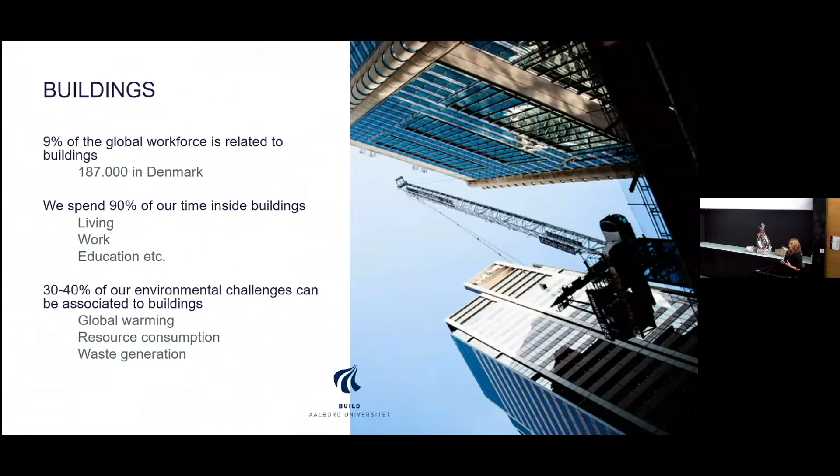Buildings are an important part of the sustainability of our society. 9% of the global workforce is related to buildings. In our part of the world, we spend about 90% of our time inside buildings, on average, of course, and 30 to 40% of our environmental impacts are related to buildings.

For the climate impacts of buildings, which is the subject I will focus mostly on today, 39% of the global greenhouse gas emissions are related to buildings. 11% is what we call embodied, that is related to materials that we use to build new buildings or maintain our existing buildings. 28% of the emissions are related to what we call the operation of a building, so when we are heating, cooling, lighting up the building, and so on. So it is important to look into environmental impacts of buildings.

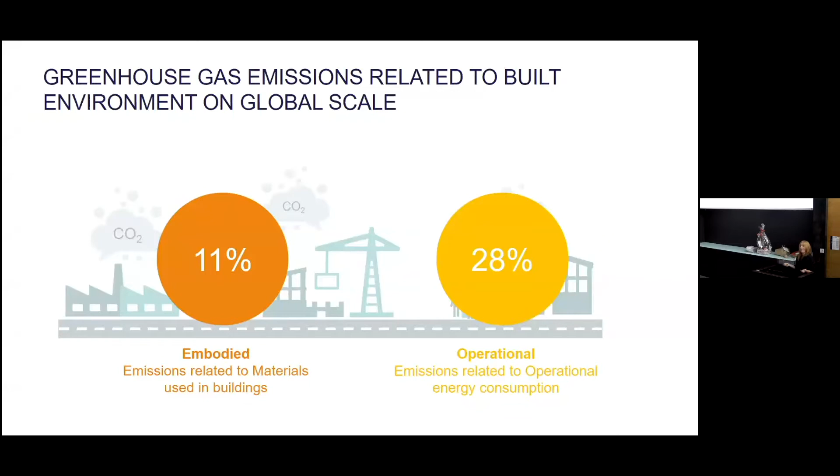Since 2001, I have been working with LCA and developing sector-specific tools for LCA. During my PhD at DTU, I worked both with development of an LCA tool for road construction and also took part in development of a tool for waste management. And then I had a break from academia and I worked as a consultant engineer in Iceland. And there I gained experience working with those sustainability assessment tools that were getting more attention in the building sector. They are called BREEAM, LEED, DGNB, and so on.

And when my family and I decided to move back to Denmark in 2009, I decided that I really wanted to work further with development of those sustainability assessment tools, because my experience from my work with it in Iceland was that it needed a lot of development, especially the use of LCA in those tools. So I was really, really lucky that I got a job at what was called the Danish Building Research Institute at Aalborg University.

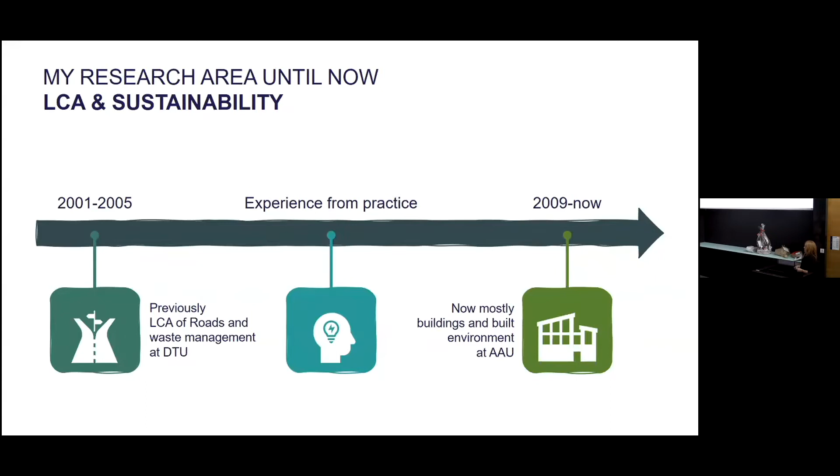And there, since 2009, I have been working with different subjects, both with the sustainability assessment tools for buildings, development of LCA tools, and also development of the methods that we use to evaluate the environmental impacts of buildings, and of course also several analyses of the environmental impacts of the built environment.

So if you look a bit into sustainability assessment of buildings, my first projects at BUILD were actually within sustainability assessment and the establishment of the Green Building Council in Denmark. First, I was participating with colleagues in the assessment of different possible certification methods that could be used in Denmark. And later, when they had chosen to work with the German system, which is called DGNB, I was the editor for the adaptation of the system from German methods to Danish methods, aligning it to the Danish building sector and needs. And later, many of my colleagues at BUILD and I have also been involved in the development of what is called the voluntary sustainability class in Denmark, which is now in a test phase in the building sector.

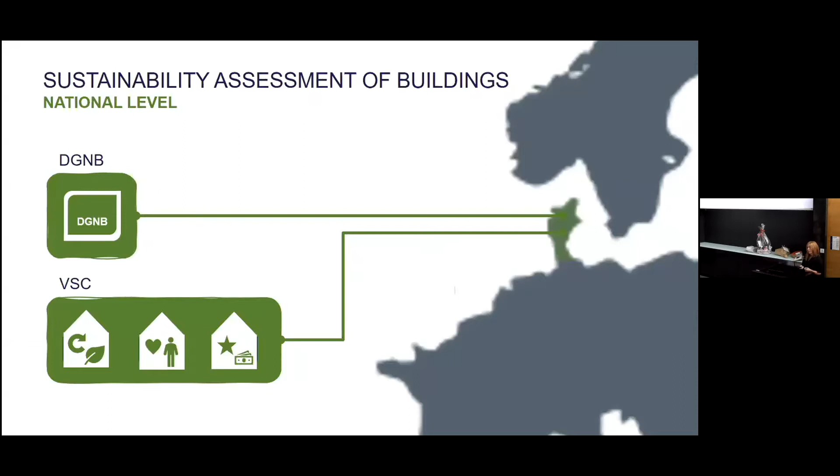On a European level, we have also participated in testing of a European sustainability scheme for buildings, which is new. It's called Level(s), and this was tested by about 18 building projects in Denmark. And Build very often has this task of documenting across building cases and so on, and that was what we did: participated with a lot of companies in Denmark to test this European scheme called Level(s).

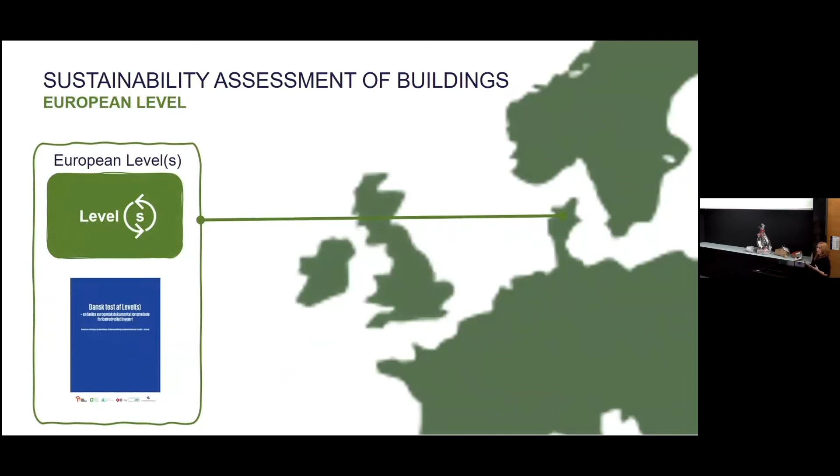And it will be really interesting to follow which role Level(s) will get in Europe, because we need a transformation of the building sector, and we can see that perhaps Level(s) will get an important role in the building regulations in the different countries in Europe.

And just to conclude on the sustainability assessments of buildings, I have also been involved in testing 10 different certification methods that are used globally. And what we have tried to look into here is to map what they include and how large a part of sustainability they actually assess, because that is really important for the users, the consultants out there working with those schemes, that they understand what the target is with those tools that are available.

So our research at Build is focused on research to the industry and to academia. And like at all universities, our research results in some academic papers. But maybe, as Per just mentioned, I am no less proud of the research that we do for the industry, because I personally believe that what we do to transform the industry into more sustainable construction also benefits the academic research.

And here we have developed the Danish national LCA tool for buildings, and we also developed several guidelines for stakeholders in the built environment, as well as research analysis and so on.

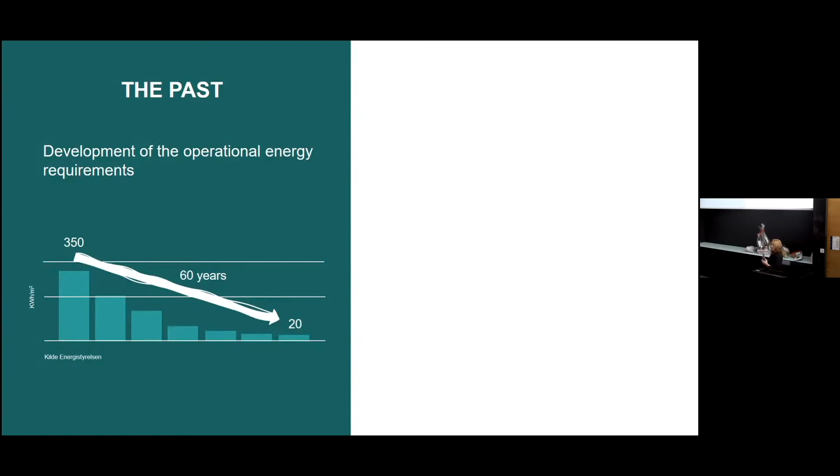So for the past 60 years in Denmark, there has been a focus on regulating and bringing down the energy consumption in buildings. And this has been a fruitful development, and the requirements are always getting stricter and stricter for the energy use in buildings when you design a building. I know there's a lot to discuss here about the use when the users move into the building, but I will leave that to other people.

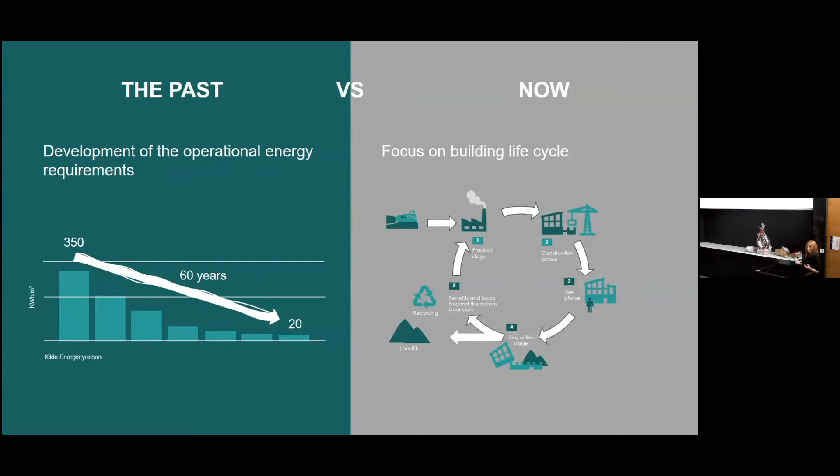But this also still brings focus to the whole life cycle of a building, where we look into both the energy consumption of a building and the materials that we use in a building. So when we are working with life cycle assessment, we look into the construction, the building materials, the building site, and then we look into the use stage of a building where we have energy use, but we also replace materials, and then there's also the end of life, the waste treatment of the building materials.

What follows then are the future scenarios, what happens in the future. So we know that buildings usually have, and hopefully all have, very long life cycles. So this is an important part to look into. But at the same time, we also know and hope that there will be a huge transformation in how we produce materials and how we produce energy and so on. So the future that we're calculating is also very uncertain, but hopefully it will be a green development.

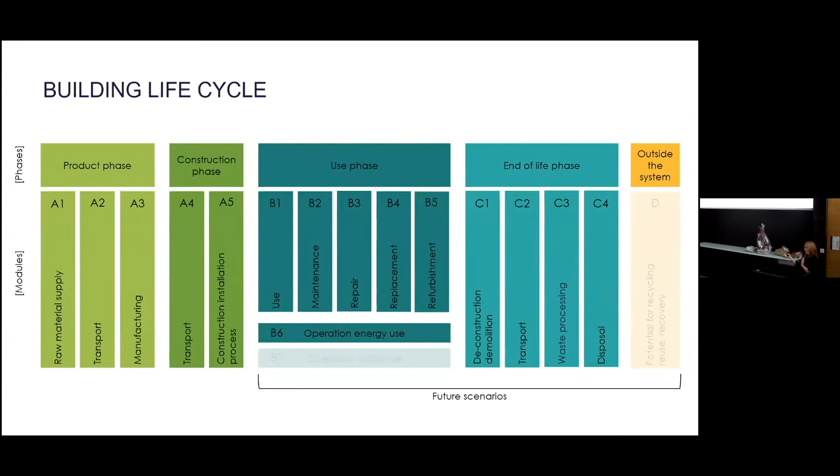So to focus on what I have been working with in research, I want to start with LCAbyg, the tool we talked about. LCAbyg has been the core and focal point of research in our group, because it's not only software development, but also development of calculation methods for how we calculate CO2 emissions and other environmental impacts from buildings. At the same time, we are working on developing a sound simplification of the methods and usability, because our vision is to mainstream the LCA discipline in the built environment by bringing this practice out from the walls of this university into practice. We are all very thankful for the opportunity to work with LCAbyg.

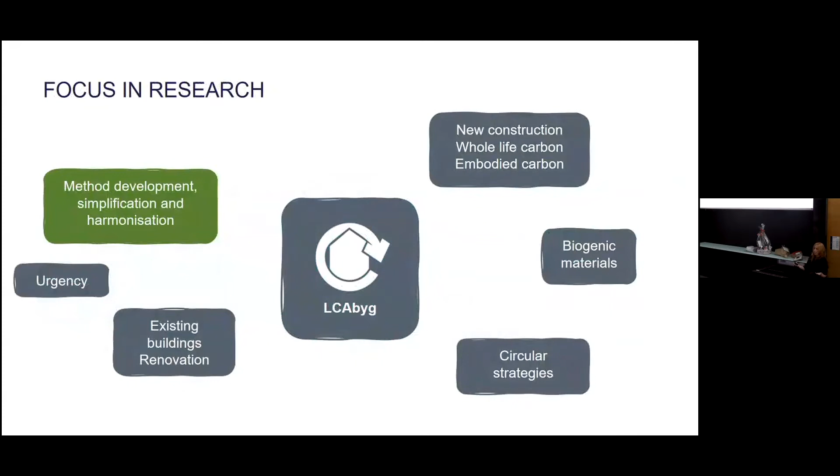I will leave this subject and talk about method development, simplification and harmonization. This is something we've worked on in two extensive international projects, the International Energy Agency Annex 57 and Annex 72, in Nordic cooperation, and also for national purposes when developing how we work with LCA for DGNB certification and now for the requirements in the building regulation. Why do we spend so much time on this? Because methods matter a lot and have a lot of influence on our results, and there is a huge focus on harmonization internationally, on European level, on Nordic level. So I will give some examples of my work within this area.

In Annex 57, one of those international projects, we worked on 80 different international case studies, which we gathered and compared, focusing on analyzing the methodological differences and their importance on results and the need for harmonization. In the figure, remember phases A, B, and C—A is the production phase. If we look at the upfront emissions, the emissions that happen now, in 59 cases we compared, we can see the reported emissions vary from 0 to 1,100 kilogram CO2 per square meter. We know from our research that embodied impacts can vary a lot, but not that much, because this is also explained by differences in methods used to calculate. That is why it's so important to harmonize methods and find out how to calculate this.

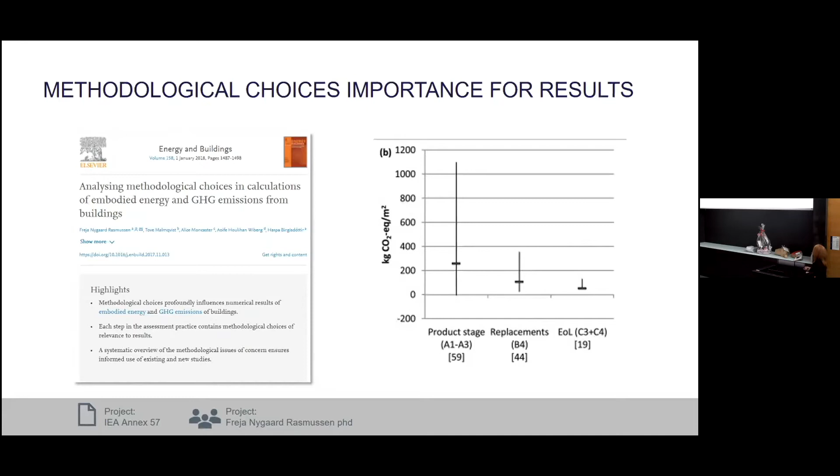A second thing about method development I want to focus on is, again, about time. This isn't a time management course, but it's so important to look into timing, and that's something our research group has focused on a lot. Here we see an empty scale looking at time in years, along with the stages in a building life cycle I talked about earlier. It's really important for us to illustrate this on a time scale for people working with our tool and understanding our analysis, because, as mentioned earlier, we have an urgent crisis. Buildings are a really important part of greenhouse gas emissions, so it's important to focus on what happens now and in the near future, because it's in the near future we need to bring emissions down.

There are also a lot of developments around timing that we're working on in our research. First is operational energy use—what we've focused on in our research group, in the LCAbyg tool, and in our method, is using a dynamic approach for calculating the future, taking into account how future emissions of energy production will change over time, since there are a lot of political agreements about changing energy production over time. That is included in our calculation method.

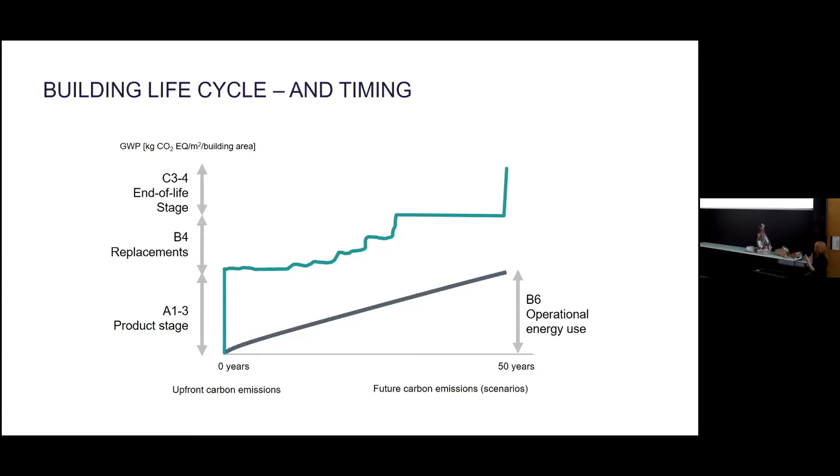That is why not all other countries are doing it this way. Here again, there are different methods, but I think many countries around us are making the same assumptions or considering that.

But it is also so important to look into time. If this was another building that has much higher emissions in the beginning, or another case where the emissions are low now, and so on, it is really important for us to take into account.

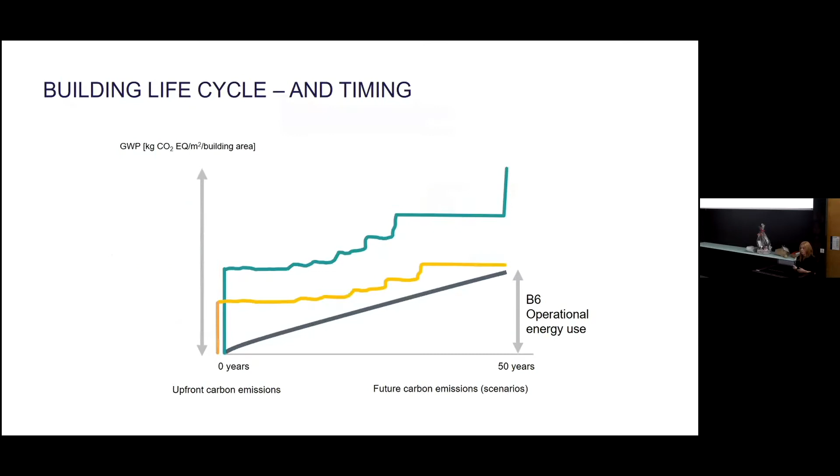And why all this focus on time? In Denmark, there's a focus on and political agreements on reduction of the emissions of greenhouse gases with 70% in 2030 compared to 1990. And in Europe, there are goals of having a climate-neutral society in 2050.

We're talking about 30 years from now. The IPCC reports show us that there is a need to reduce emissions as fast as possible, as Pierre also mentioned, to be able to meet our agreements to reduce our emissions.

First, one important report and study we have been working on was this whole life carbon assessment of 60 building cases, which was published in Danish in 2020 and also translated to English due to requests from the European Commission. This report was done about 1.5 or 2 years ago. The purpose was to establish sufficient data background on the climate impact of buildings in Denmark over the life cycle, and also on basis of this to calculate possible reference values that could be used in the building sector.

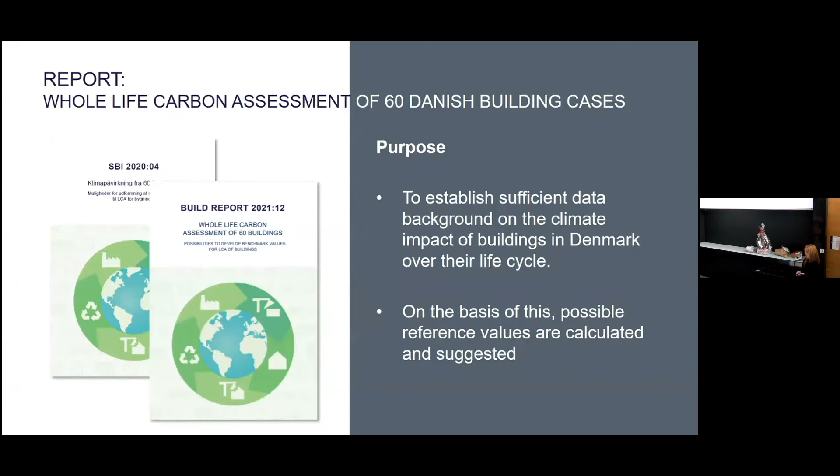And you remember that this is something that has not been regulated yet, the use of materials when you construct a new building. But this was the groundbreaking part that is happening in 1 year, 1.5 or so.

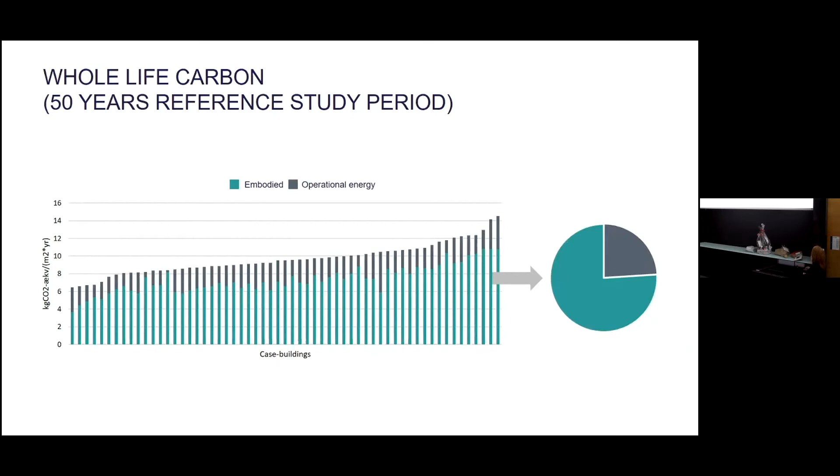Important lessons learned from this study was the importance of embodied impacts. They are important, about 75% often in building cases. Secondly, the timing of emissions is important - when do they happen, over time.

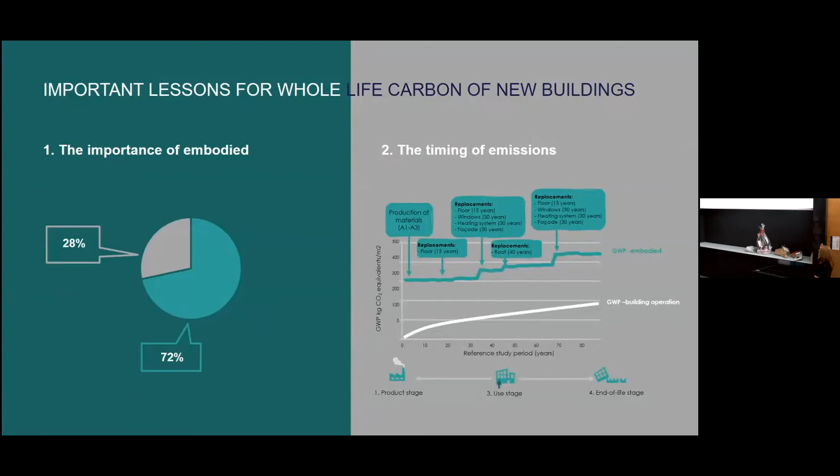That is important. If we look into the results, when we calculate the whole life carbon, both energy and materials, the results vary a lot, about a factor of 2.2. And if we look into the embodied impacts, the materials that we have not been regulating, this varies from 3.7 here to 10.8. So this is about 3 times.

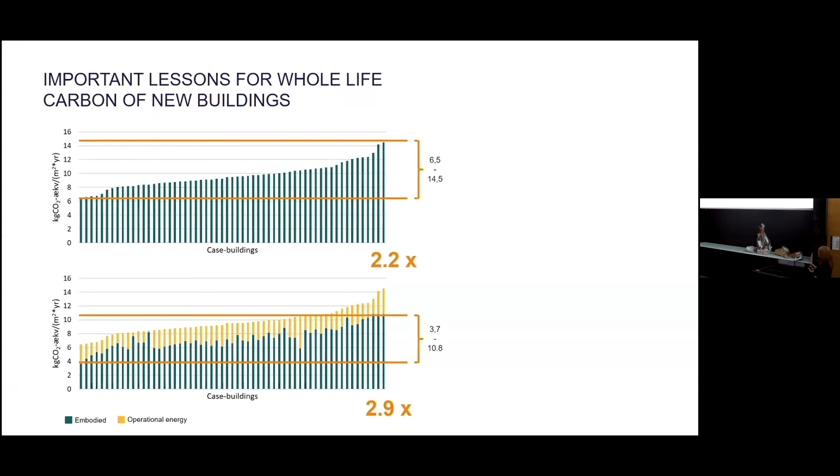So this must tell us that there is a huge potential to do some reductions, because if we can build some acceptable buildings with about 2 to 3 times lower greenhouse gas emissions, then there must be a potential for many of the other buildings to follow this.

So where have those results been used? In Denmark, the government had climate partnerships, cooperation with the industry and different partnerships. One of, I think, about 13 partnerships they established in 2019 and 20. One of them was focusing on the construction industry.

This partnership of the construction industry also used the results of our study to suggest, this was in March 2020, that we should have requirements for LCA CO2 requirements in the building regulation in 2021. This is 12 kilograms CO2 per square meter per year based on our results. And then we should also have an incentive for the industry to work with even lower requirements.

So we have this voluntary sustainability class to try to have some competition here. And it's also important for the industry to know the future requirements to come. So in 10 years to come, you should know that we should halve the emissions, going from 12 to 6.

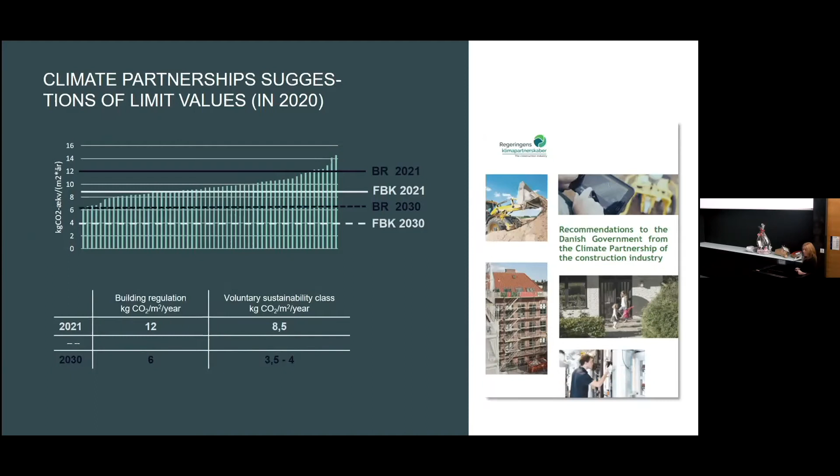And then the voluntary class should be among the lowest buildings. And what we should know is that in 10 years, all normal buildings should be around the best buildings that we know today, and for the best buildings, we need to figure out different ways how to build those. So they should be here around 3.5 to 4 kilograms CO2. And this is something that needs a lot of new ways of thinking in the building sector.

And then the new national strategy that I also mentioned, which came in March '21, they also had those requirements, followed up on what came from the climate partnerships. So we have both a building regulation requirement and a voluntary class, and they also know what the requirements will be in 10 years. And just to see, this is in the same area of ambition levels as was proposed by the climate partnerships.

So if you look from a national perspective, where they have used our research to look a bit into an international perspective. And here again I come to the Annex 57 project that I mentioned earlier, where we again looked into those 80 buildings. And here the conclusion for our international cooperation was that embodied impacts are important, but above all, the methodological harmonization needs that I mentioned earlier are really important.

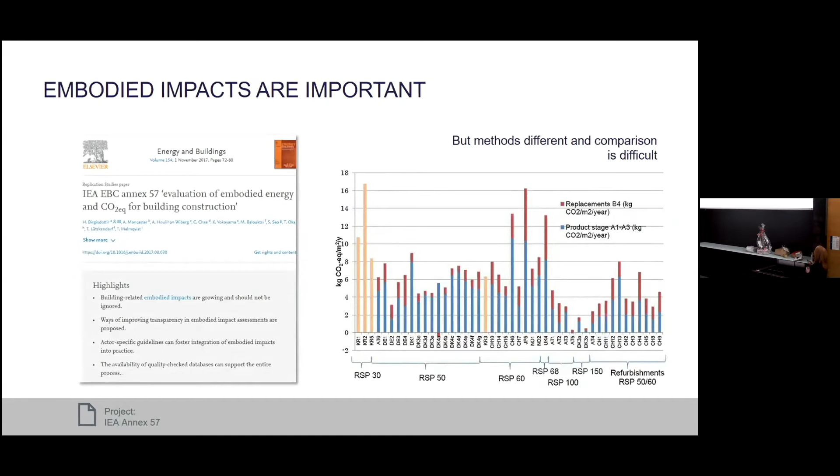And a second project that we have been working on, the Annex 72, in relation to that, a group of people from that project were also working together, several researchers from different countries. And here we were analyzing 650, I think if I remember correctly, building cases that we were working with, analyzing those.

And what we concluded there by looking into several international studies, was that although we know those methods are a bit different, we tried to align our analysis so we could compare as well as possible. But the bottom line here was the message that embodied impacts, the materials, are really important to include in regulation, and that embodied greenhouse gas emissions might actually be the hidden challenge for effective climate change mitigation.

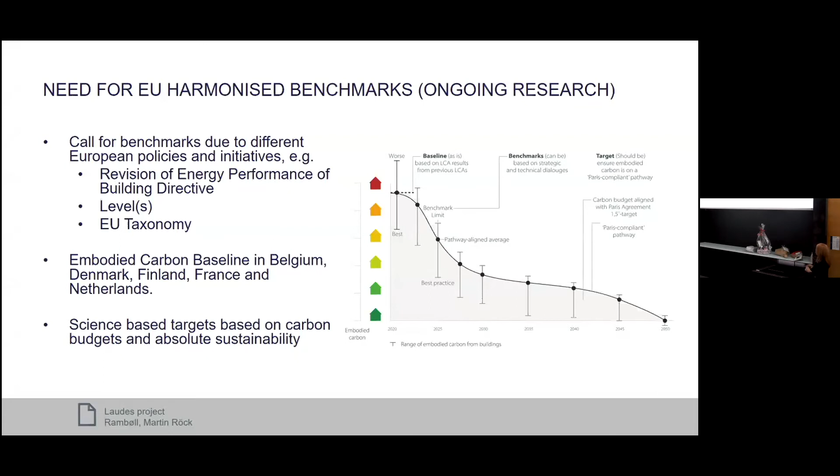But also what we want to do is to take into account that what we have done earlier is often to look into how did we build and how can we reduce a bit, always depending on how we built yesterday, and reduce a bit better. But what if we look into the real climate budget that we have? What is then our benchmark if we look into what we actually have to work with? And that is one of the things that we are working with in this project.

So there is no doubt that we need to reduce climate impacts related to buildings, but what do we have in our toolbox? So again, from the Annex 57, we looked into different design strategies and compared reduction strategies, how much you can reduce with different design strategies. And there are a lot of potentials there.

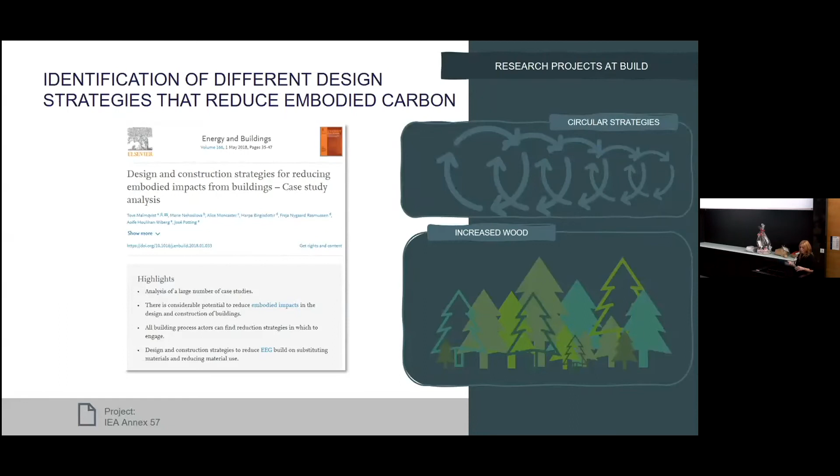And what I want to bring into focus are just two, if you call it a design strategy, that we have been working with in research projects at BUILD. So one is about circular strategies and one is about increased use of wood in buildings. I could, of course, mention many more, but I will focus on that. So first, use of biogenic materials, increased use of wood in buildings.

So the conclusion is, of course, a quick conclusion now, but the conclusion is, well, it is not enough to just say we should use wooden buildings and then everything is fixed. Because we can also make some unclever decisions about the roofing material or the foundation or whatever. So again, the use of our LCA tool is really important to make sure that we continue with the clever decisions to keep the result in the lower end.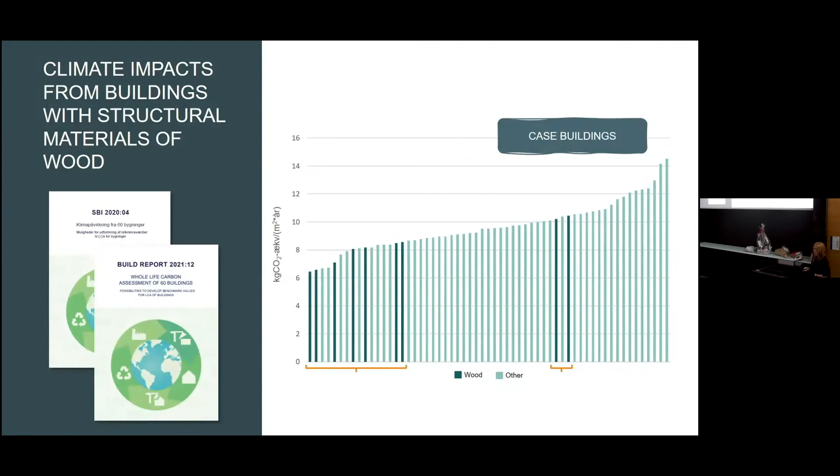And, well, there are several studies, not just this study that I showed earlier, but several international studies that suggest that wood in buildings can help to reduce the climate impacts. And that is why we have a larger research project on this. And we have just published a study where we examined 79 scientific articles that focused on 226 cases using wood in buildings.

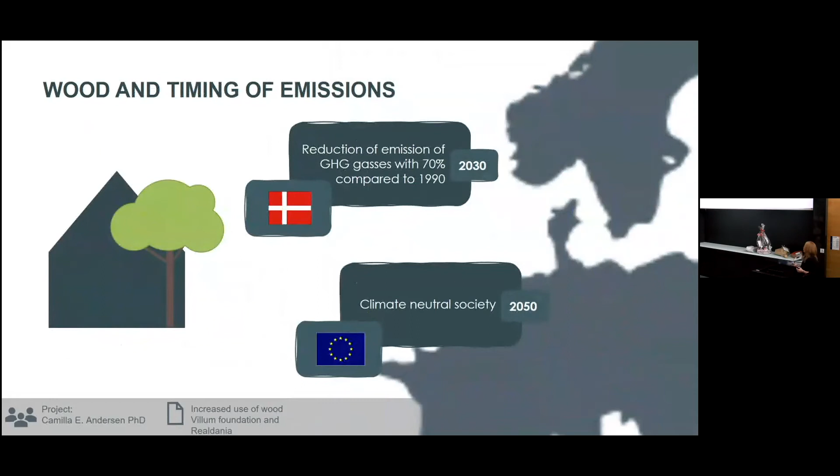And we are also looking into use of wood in buildings from different perspectives, not just because of our goals to reduce in the urgent future, but also there's something about this time scale and some properties of wood that we are working on. So timing of our emissions is really important. Greenhouse gas emissions accumulate in the atmosphere, and the sooner the emissions occur, the longer time they have to accumulate there. So there is larger potential for global warming if it happens early.

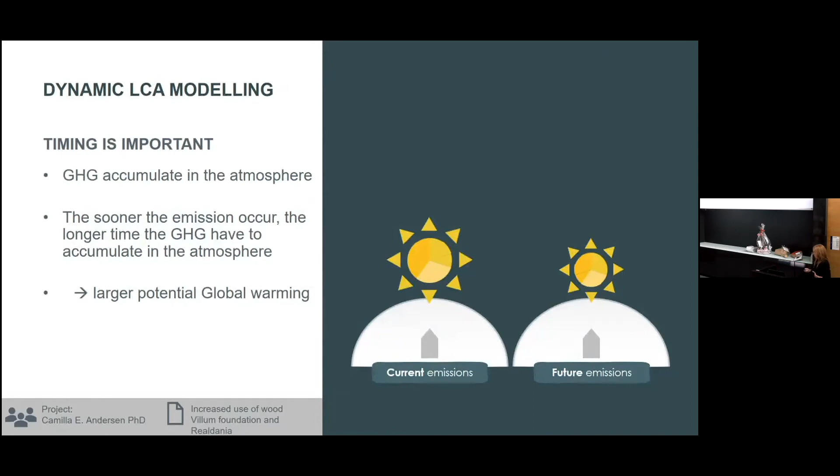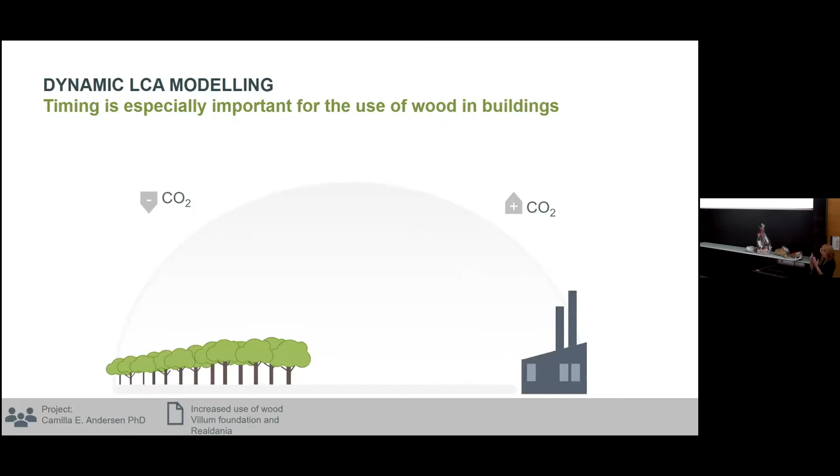But there's also something about wood that is really important for us to look into, because when trees are growing, they absorb CO2 from the atmosphere. And if this is used in buildings, it might be stored there, and then at some point in the future, not just when it is combusted, but also when it is degraded, this CO2 will at some point be released to the atmosphere. But what many researchers and the building industry are looking into is how large is this potential? How much will this save us if we store more wood or timber in buildings?

And here again, we know that dynamic LCA modeling is important to look into this timing. And again, we do things in different ways. So now I have just Denmark and Sweden, the neighboring countries, just to illustrate how we calculate this. So in Denmark, as in many other countries, we allow taking this uptake of CO2 in the wood into our calculation, so we can see that in our time scale there might be a potential. This is an extreme good case, but they might differ. And then in the end, hopefully not after 50 years but in much longer time, this might be released again. But we need to take that into account because this will happen at some point.

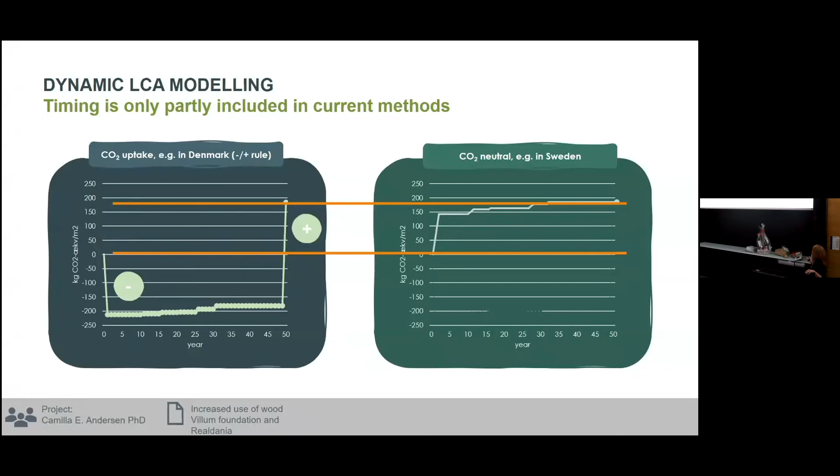But in Sweden, or in other countries as well, the wood is regarded as CO2 neutral, so we don't take this minus into account, but we have the same results in the end.

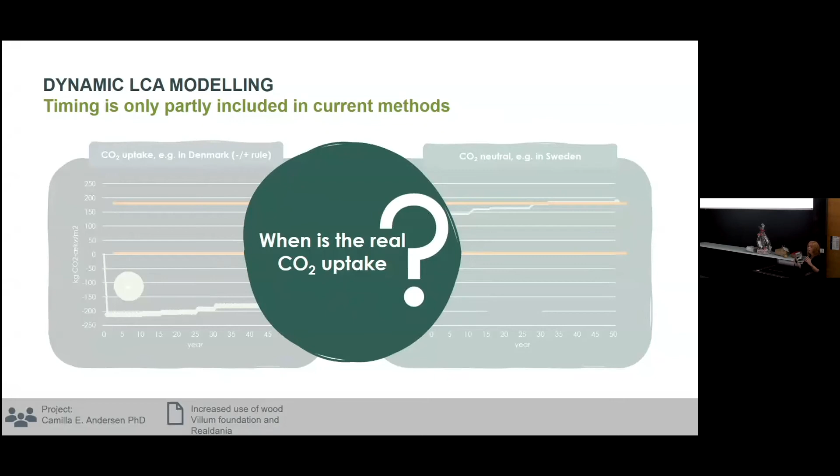But this is something that we really want to work further with the building sector to find out when does this CO2 uptake happen, because that is really important for us. Since we have to reduce a lot in the next decade, and by 2050 be CO2 neutral, it's really important for us to understand this.

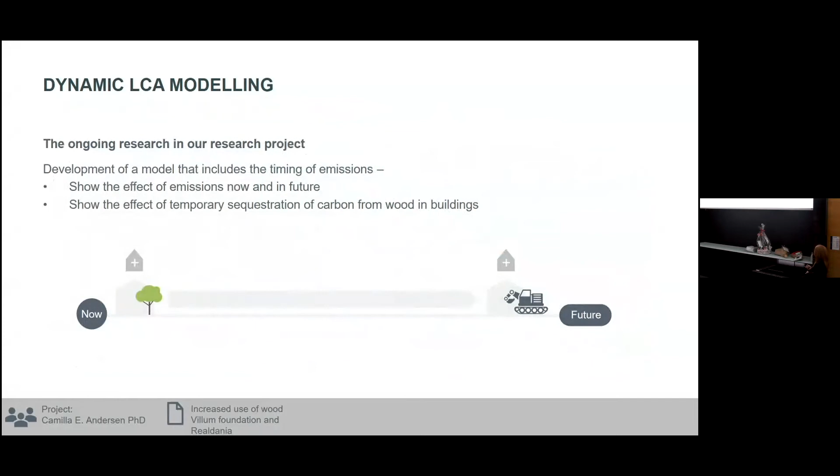And that is what we are working with in ongoing research projects, where we are looking into dynamic modeling of this, and when do we really have this uptake? How much will it help us in fixing our problems? Yes.

Very quickly about circular strategies. There's a lot of focus on circular economy, recycling, reuse. How can we work with that? And we need to know what is the potential here also. And of course, reusing materials and different other circular strategies, we know in a resource perspective there is a potential, but now I'm focusing a lot on the CO2 perspective.

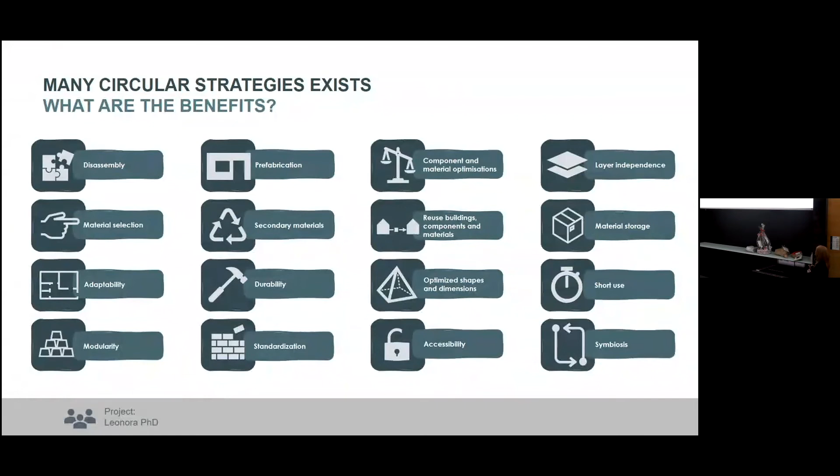And this, again, relates to a PhD study performed by Leonora, where we can show, okay, looking into literature and practice, many circular strategies exist. In my point of view, many of the circular strategies that we are talking about here are actually also what we just called eco-design and so on. But now they are here defined as circular strategies. But what is the real benefit? That is really important for us to look into.

And again, my take-home message here today: what we need to look into is when do we really have those reductions? Because we might have many good intentions to work with circular strategies, and I'm sure that in most cases it is good, but if we are focusing on CO2 and we think that we can solve our climate problems with circular strategies, we need to look into when does it happen.

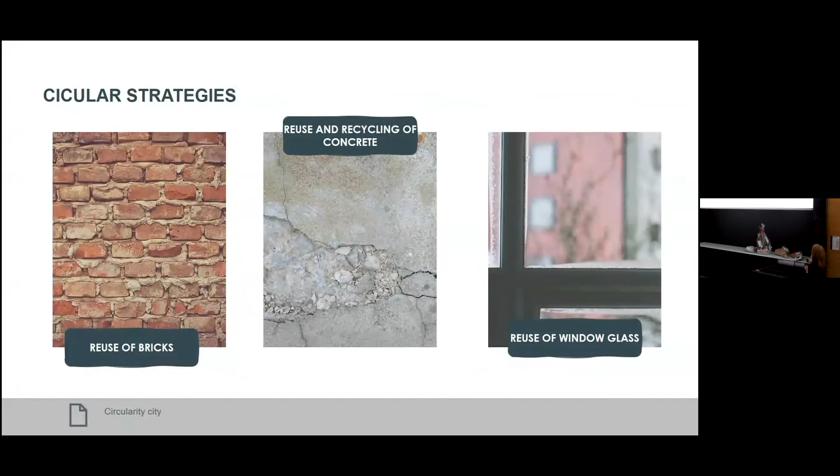So if you focus on upcycling, upcycling is like recycling, and there the effects happen when we build the building. Then different circular strategies exist, and there is a lot of focus now on reusing bricks in buildings, reusing, for example, crushed concrete in new concrete, and reuse of window glass. So if you just look at those and what we have done in some studies, then we can see reused bricks have quite a high potential to reduce compared to virgin materials. So that is a good strategy to work with in terms of CO2 and in terms of the amount of reused bricks we have available.

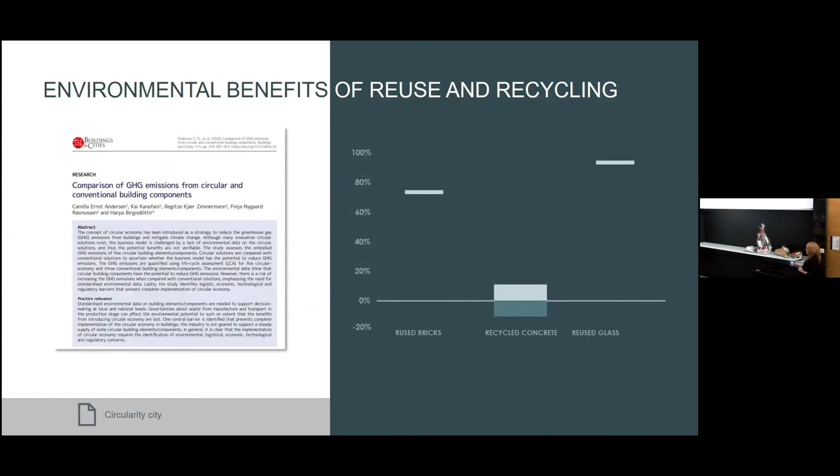If you look into recycled concrete, it is a good strategy in a resource perspective and so on, but when we look into CO2, then not that much savings, and savings will not necessarily happen. But again, reusing glass, if it is possible to use this old glass in new windows, then there is also quite a high potential there.

And then what we have also been looking into, and what Leonora has been working on, and Freya in her PhD studies, is design for disassembly. That is where we produce materials today, and we want to make them so good today that they can be reused in the future. And that is, of course, very important for us. But we have to keep in mind that this will give us some savings later on.

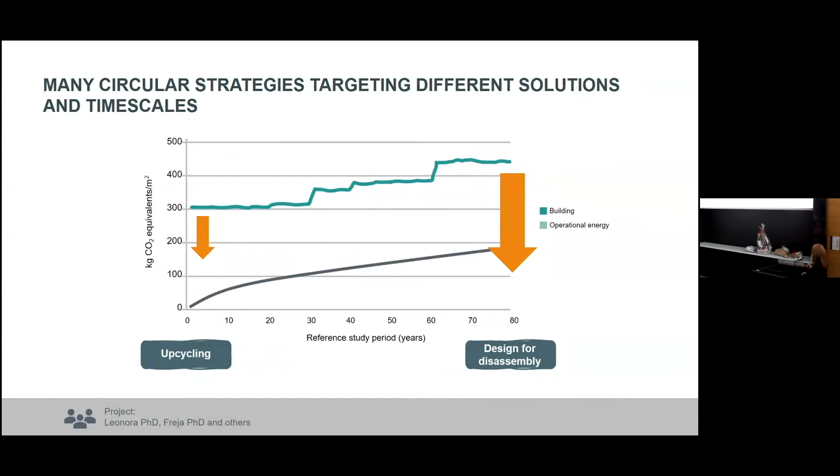But here, Leonora has worked in her PhD to look into, okay, if we want to do this, how can we calculate this, and how can we divide the emissions that happen, or should we do that, divide the emissions that we have when we produce materials, for example here, a concrete beam that perhaps can be reused again.

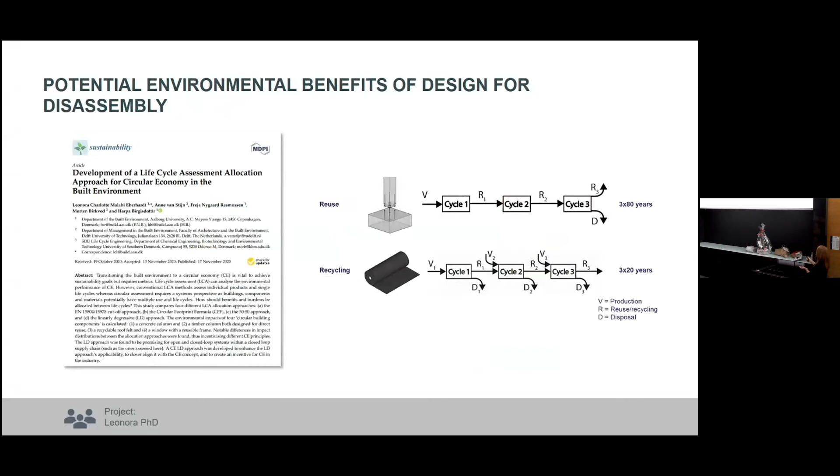We want to focus on renovation today. There's a huge focus on renovation of existing buildings in order to bring this energy consumption down, and there is no question that is something that we need to do. And then what we have to keep in mind is that we are using materials, so there will be some embodied emissions used, if we can say so, in order to bring the energy consumption down.

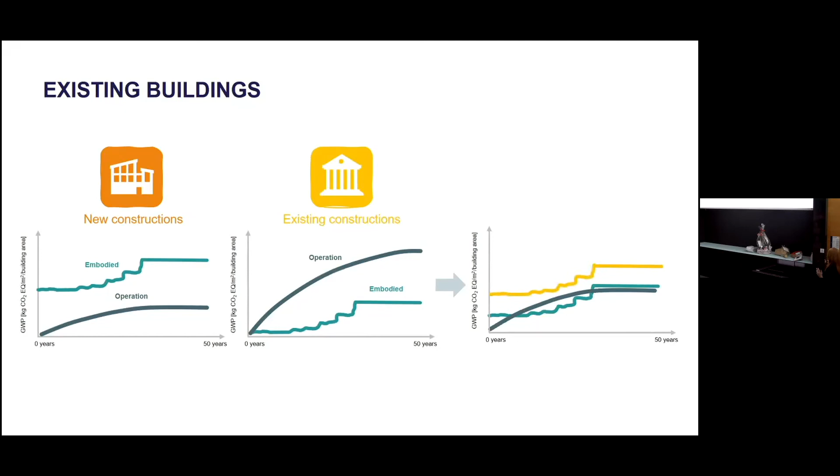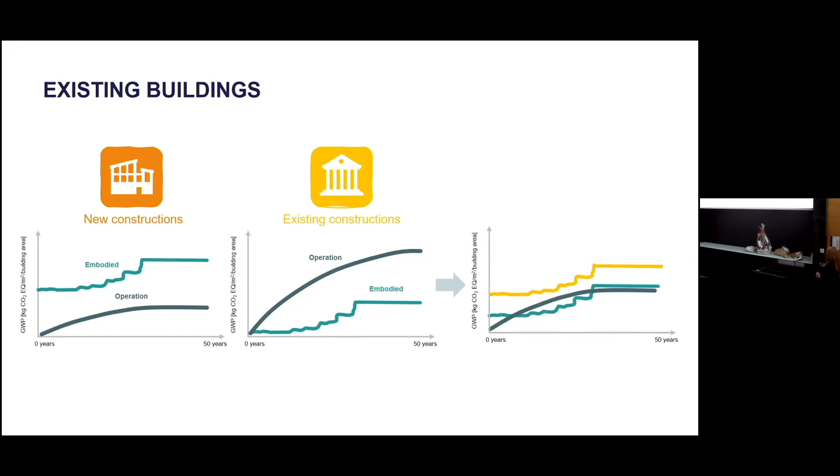But what we know is that very different methods might be used for those, and many different materials exist. So as we showed you earlier, that you can also build buildings with different methods, it is also important to take into account the embodied emissions that we are spending in order to bring down the energy consumption.

So I am slightly getting there, and I want to talk a bit on urgency. Maybe you think I have been talking on urgency all the time, but I want to focus on that. So in Denmark, we have the Earth Overshoot Day on March 26. That means that in Denmark, we need about 4 Earths for our current consumption. And we know that we don't have that available. And in order to work with this, the emissions are also quite high.

And we have these requirements in Denmark for CO2 emissions, and are they then meeting the need for reduction? When we have set those benchmarks, for example this one of 12 kilograms CO2 per square meter per year, that is based on something that we call a bottom-up approach. It is based on experiences that we get on how we build buildings, trying to do always better and better. But the top-down approach focuses on what is our budget and what is then my benchmark. That is something that we also need to look into in our research.

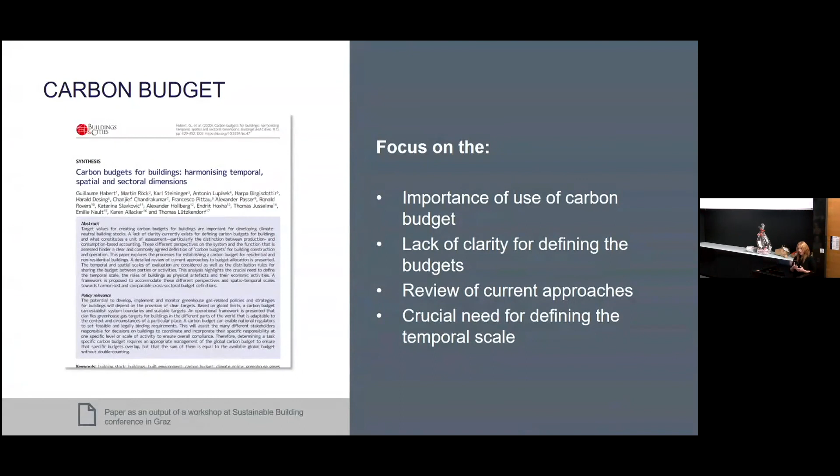So that is something about carbon budgets that we are working on together with many international researchers, focusing on those budgets and on planetary boundaries, which say when we are using more than what is available with only one Earth. I have been so lucky to be involved in different projects, so here I'm highlighting the people that have been really working on it. The master project of Pernille and Camilla, where I, together with many others, have been supervisor. Here we've been looking into how we are building our buildings. These are the mini CO2 houses, which are good examples. But how are they meeting our

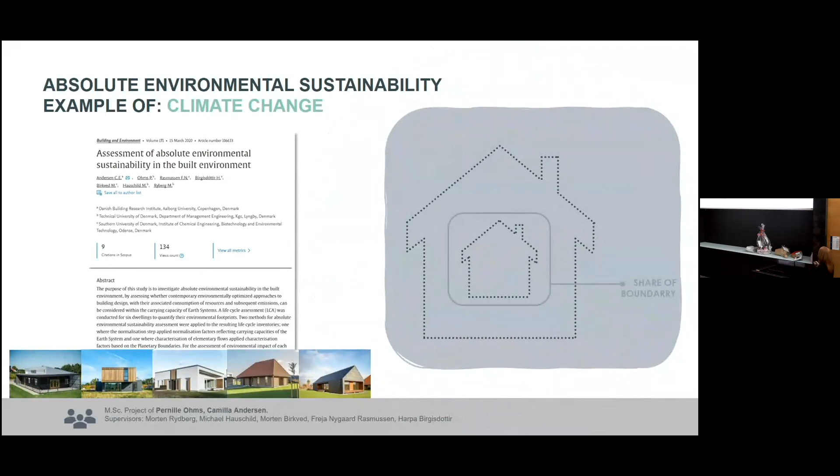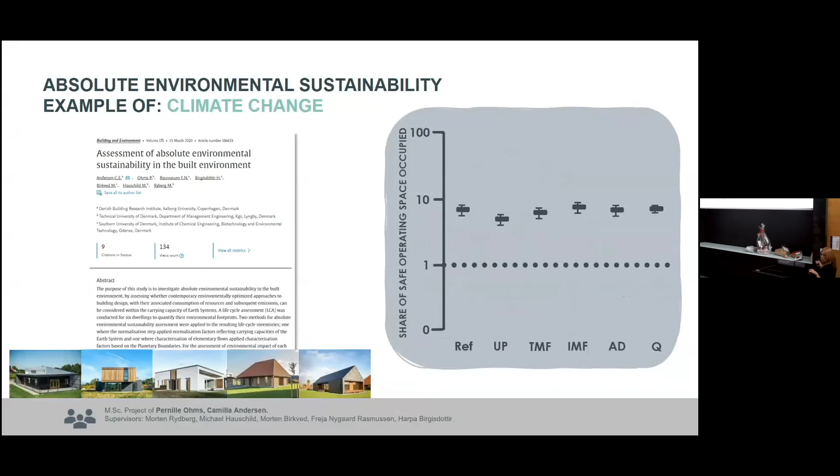absolute sustainability? Just to go quickly into the results of those different houses, the reference house and the upcycle house and so on, they are about 5 to 10 times higher than what should be absolutely sustainable, assuming we have one Earth available, if you simplify it a bit.

I also want to highlight ongoing research by another PhD student, Lise at Rambøll, where I'm also among many supervisors. We are also looking into the top-down approach for the CO2 limits, looking into the budgets that we have to meet the Paris Agreement. I will not go into details, but we have different methods to estimate, or Lise is working on it, what our budget is if taking this into account.

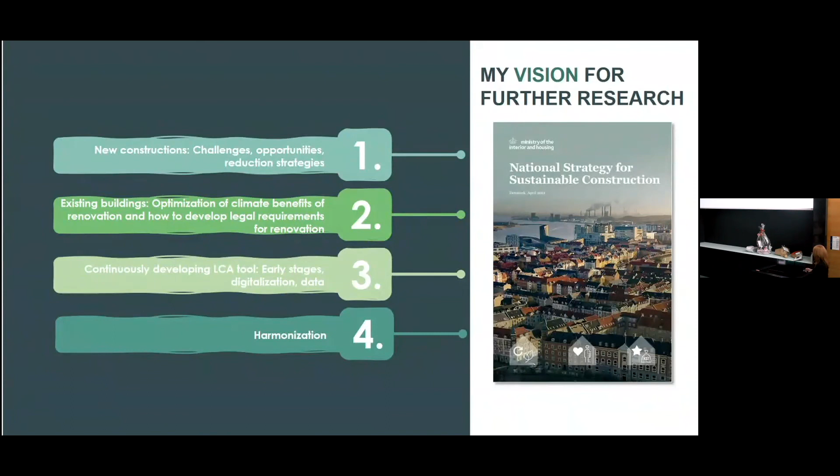We know what to do for the next 10 years, to look into existing buildings and new buildings and our tools and harmonization. So I'll not go more into details of that. And also for us to work with a roadmap development for the Danish building sector to find solutions for how we can reduce in 2030 and in 2050 with different strategies, and look into the timing.

For teaching, my vision is that all students at universities in Denmark, not only in Aalborg University, should have a minimum knowledge of LCA in the built environment. So when you are a building engineer, civil engineer, it's our responsibility that you know a little bit about the emissions and the decisions that you have, but also that we need a big part of the students that have a deep knowledge about LCA.

And what the Danish building sector needs to understand is that the universities cannot provide us with enough new students in the near future to solve this. So we need to have a lot of focus on continuing education for the people that are working already out there. And this cannot be covered by 1 or 2 day courses. This is a bigger education that we need. There's a new discipline here to work with, and we need to realize that.

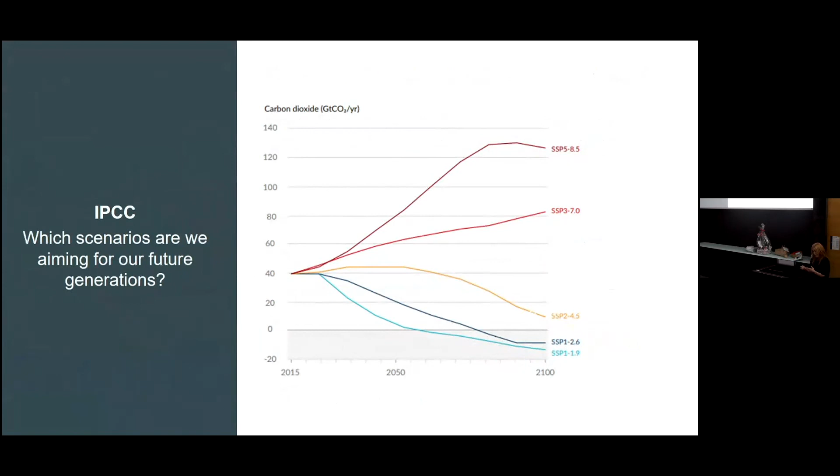But they can be 96 years old in 2103, 2109, and 2113, if they are lucky to be as healthy as my grandmother. So all these figures about time and our emissions, and what happens now, and their effects on our future, they are relevant for us. And the IPCC has 5 different scenarios for the future, and what was mentioned earlier is that we need to stay on the blue line here if we want to stay below 1.5 or 2.0 degrees. But this is not the track we are going on at the moment. We need to have urgent changes if we want to be there.